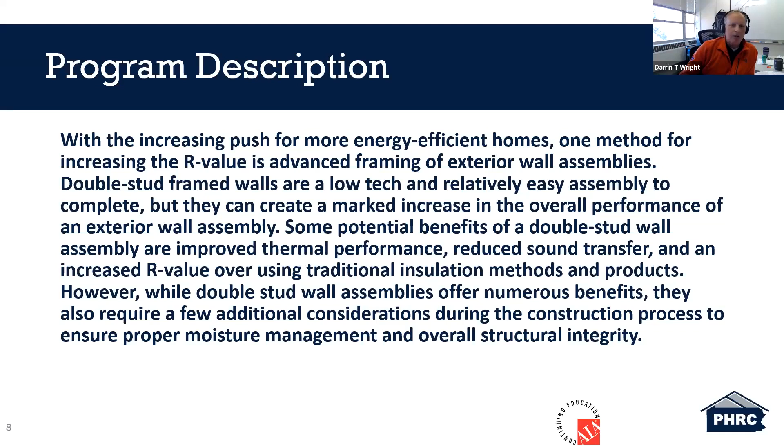So for me, I have a little bit of experience with double stud framing. I don't know, I've met some of you. Most of my construction experience really focuses in the southeast, in the Asheville, North Carolina region, and the coastal regions of South Carolina and the mountains of North Carolina. So down there, that zone, we weren't looking to push super insulation at that point anyway. I'm not sure exactly what they're doing in the mountains down there now, but back then I was always familiar with double stud framing. I was always intrigued by it. So that's one of the reasons why I picked this program and this topic.

So what I want to do today is give an understanding of the components of a double stud wall assembly, and show how a double stud framed wall can allow for increased R value, decreasing air permeability, and also lowering exterior noise pollution.

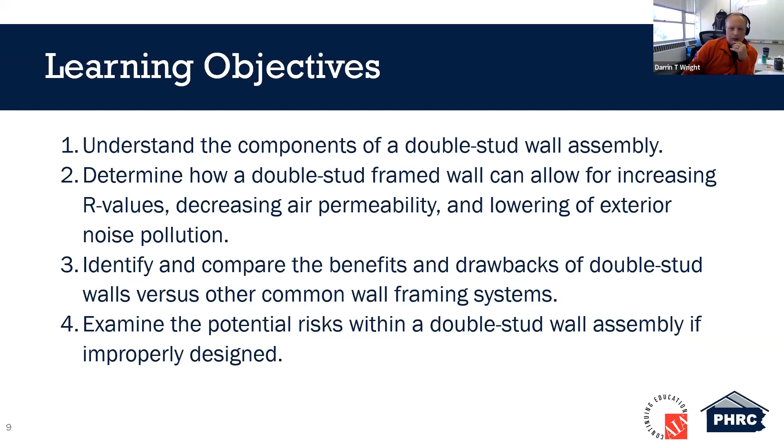Identify the benefits and the drawbacks. I know that some people feel there's a lot of drawbacks, and we'll try to get into that, not on a super deep level, but on a level I think we can all understand. And of course, examining the potential risks within the double wall assembly if improperly designed. I mean, that's something we can say about any wall assembly. If it's improperly designed, there's inherent risk.

And of course, as we say with all our webinars, this is where we're at right now in Pennsylvania. We're in the 2018 code book. So I know 2025, they're looking at revisiting that and exploring options moving forward after that year, and there's potential for change to what we're dealing with right now. But again, here we are, we're 4, 5, and 6 in Pennsylvania.

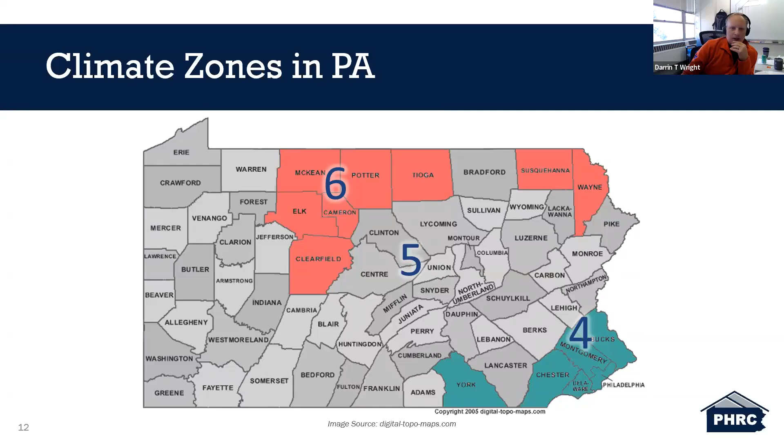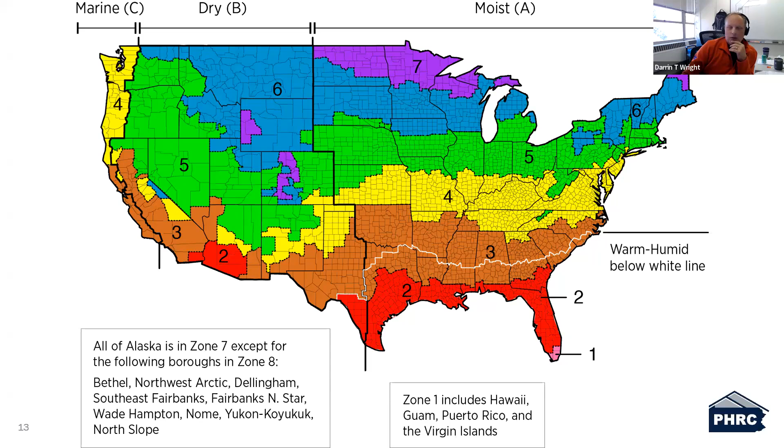And I kind of threw this one in here too, because I wanted to explain some of my references for builders, where they're doing most of this construction that I'm referencing, which is up in the Massachusetts, Connecticut, New England area. As you can see, especially Massachusetts, they're within our zone of construction. I know zone 5 in Virginia is different than zone 5 in New York, but our weather and climate zones are pretty similar, so they're using this type of framing more than we are down here.

And of course, the 2018 IRC table right here, I have highlighted what I'm going to be referencing and talking about, what we're currently following. We know we have R20 or R13 with 5, and then zone 4 is the same. In zone 6, we get a little bit more intense: we have R20 with 5, and R13 with 10.

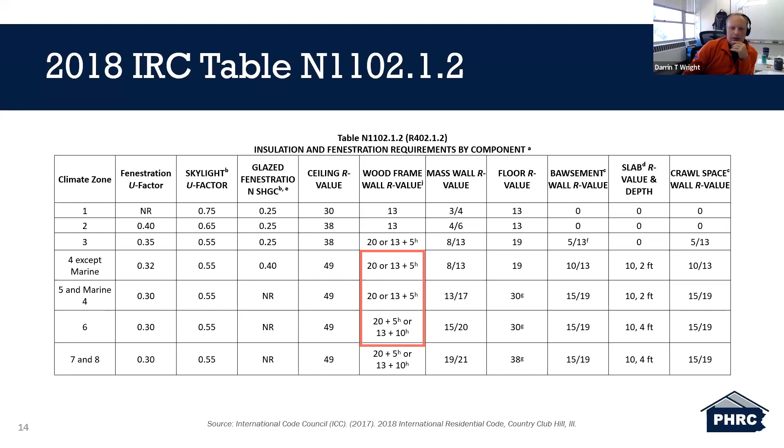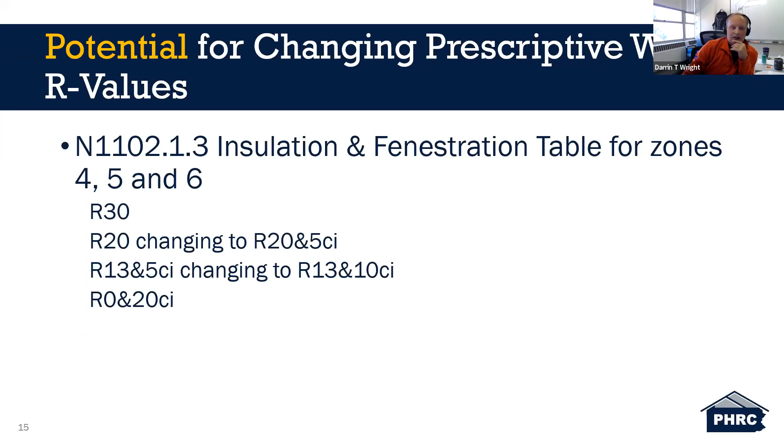The changes, the potential for change if we move to the 2021 code, are a little bit more intense. We're going to be requiring an R30. An R20 is still going to be there, but you're going to have an R5 of continuous insulation on the outside. If you're going to stick with an R13, you're going to have to bump that up to 10. And if you choose for some reason to have no insulation in your walls, you're going to have the option of an R20 of continuous insulation on the exterior of your building.

And this is what the table looks like in that code. The nice thing about this is they're all the same—there's not really a variation from 4 to 6.

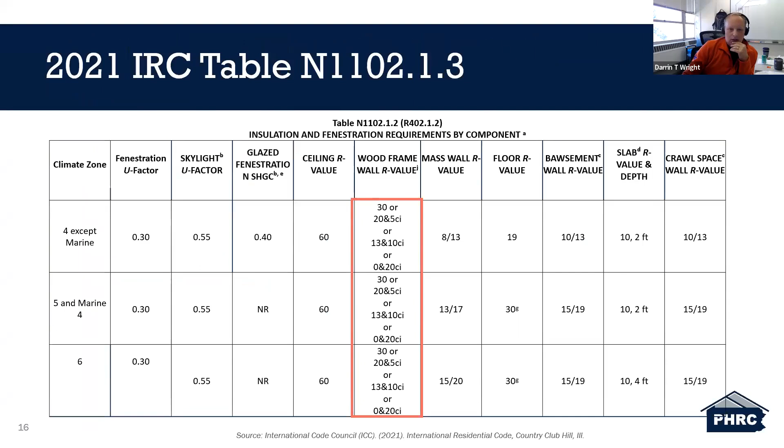Okay, what is the perfect wall assembly? Why am I asking this? Because I get questions quite a bit of somebody saying, just tell me what I need to build. What's the perfect wall that I can just build and be done with it? And as Joe Lstiburek said, the perfect wall is an environmental separator. It has to keep the outside out and the inside in, and it's as simple as that. But there is no real perfect wall assembly that you can just build and use it from location to location.

Obviously, walls we're designing with 4 control areas in mind. We want to control the rain, we want to control the air, we want to deal with the vapor situation, and thermally we want to be able to stop the movement of heat or cold within our assembly.

And I say the perfect wall assembly because what I really want to say is, even here in central Pennsylvania, in Centre County, if you were to build a house on top of a hill where it's sunny, you have no trees, and it's breezy up there, and then less than a mile away, you could be down in a deep valley surrounded by trees next to a stream, where you might get sun only 3 hours a day. You're both within zone 5, but you have 2 completely different construction environments there.

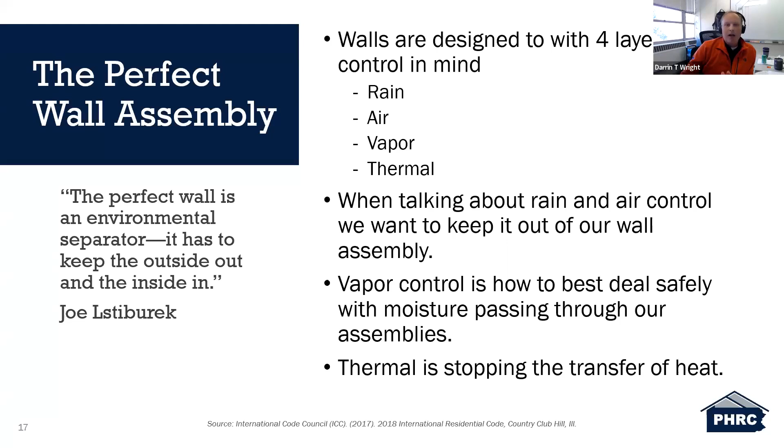So there is a perfect wall assembly, but there's just not one that you can use across the board and be really comfortable using it, in my opinion.

Double wall stud framing is maybe considered advanced framing. It's not really optimal value engineering framing. What this is here is just a more efficient way of framing a wall, so you're using less wood in that assembly and you can get more insulation in that assembly. That's really where this started: obviously you're going to save money by removing wood and streamlining your framing, but you're also going to increase the R value of your wall assemblies by framing this way.

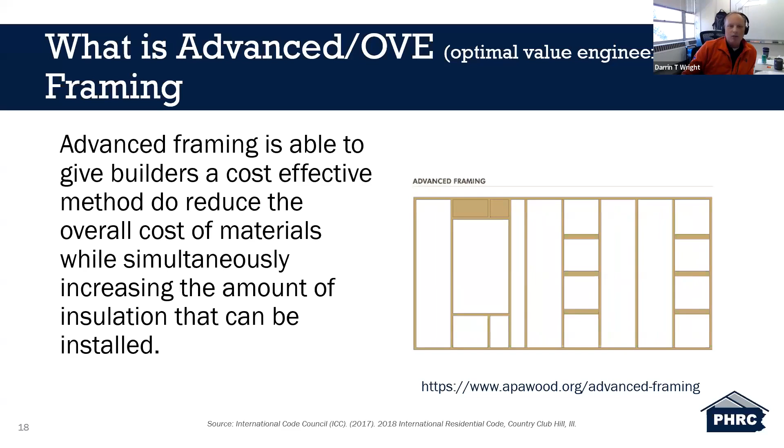Why double stud wall for me? In my opinion, it's a very 'uncomplicated' system of framing. Like with any other type of advanced framing assembly, you can make something more complicated if you want to, and there are reasons why you might have to make it a more complicated assembly. But on a really basic level, a double stud wall assembly is just basically 2x4 framing with another set of 2x4 framing in front of it. Anybody with basic carpentry skills and knowledge can frame a double stud wall.

It has the potential for extremely high R value. Obviously, as deep as you want to make this cavity, you can increase the R values, reaching R30, R40, even up to R50 if you want to. Another benefit of double stud framing is you virtually remove all thermal bridging. Obviously you're going to have a little on the bottom, where your sheathing transitions from the exterior to the interior, but if it's framed properly, it's an excellent way of removing most thermal bridging from your wall assembly.

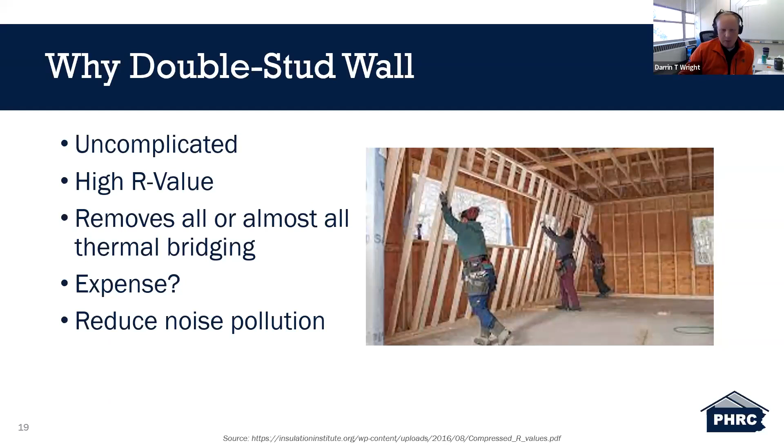And one benefit is it reduces noise pollution. So if you live in town or next to a busy road, this wall is much quieter than a traditionally framed wall. I think a lot of people might have seen some variation of this assembly, called an offset wall, that people use on the inside of houses, maybe to separate a bedroom from a living space to help reduce that noise pollution, that noise transfer.

The level of complexity, there are many different variations of a double stud wall. The most basic traditional sense, it's just a 2x4, 16 inches on center. And you can go up from there where you're doing different versions of this.

There's a version that uses a Larson truss that's actually hung on the exterior of a wall. So you'd basically shift your bearing wall from the exterior wall to the interior wall, but that exterior wall is also pushed to the outside and it's hung. We'll talk a little bit more about that later on.

In areas where it's heavier wind loads, you might still be required to do 2x6 framing, and you just might frame it on the exterior, not the interior. You just might feel as a builder, even if it's not required, that's something you want to continue to do.

And there are options. You can frame a 2x4 wall, 2x4 wall, 24 inches on center. It might be a good idea to get an engineer sign off on this, just to be sure. I'm talking about the exterior, not the interior version of this.

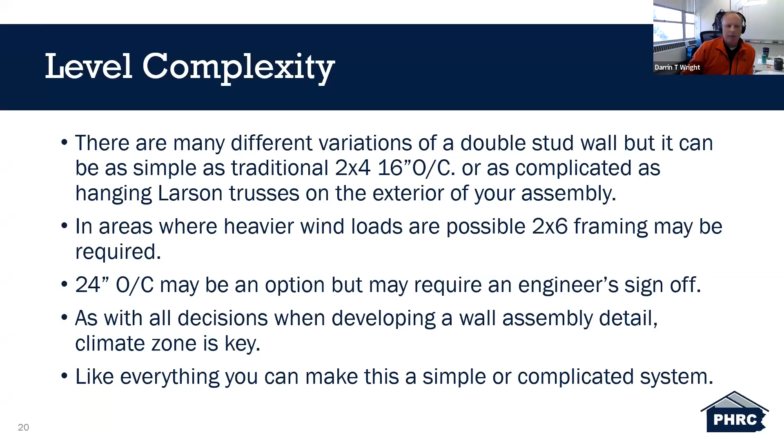Again, as with all decisions when developing a wall assembly detail, climate zone is key. Pay attention not only to climate zone, but also the location of where you're going to be building this assembly. And like everything, you can make this as simple or as complicated as you want.

And if you use 1/2-inch plywood on that, you want to take into account your rough openings and expand them the adequate amount to compensate for that plywood. The worst case scenario is if you didn't do that, and you already have your windows ordered - then you're in trouble, and it's a complicated mess to deal with.

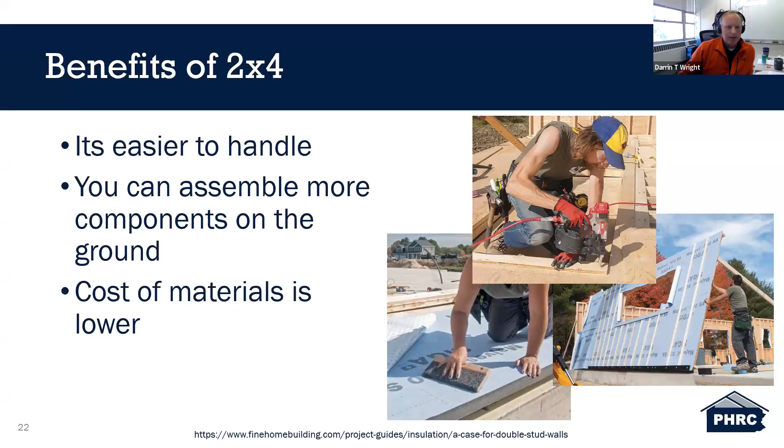Now, there are different variations of a double stud wall assembly. One that we've seen recently here in State College on a retrofit was they use a Larson truss on the exterior of the building. A Larson truss, if you're not familiar with it, is basically a site-built assembly that kind of resembles an I-joist, but it's technically not an I-joist. In this application, like the one in town here, they just removed all the exterior siding, anything right up to the wood sheathing, and hung their trusses on that. They built them in place, attaching the 2x material your engineer has spec'd, applying plywood gussets, and going on from there.

It's a more complicated way of building, obviously, but in situations where you don't want to lose floor space and want to keep your interior as open as possible, especially if you're retrofitting an older house which already has a small footprint, this is a really good option. But this is going to take some more exploring. If this is the option you want to explore, it's going to take a little bit of work on your part to really understand how to do this best.

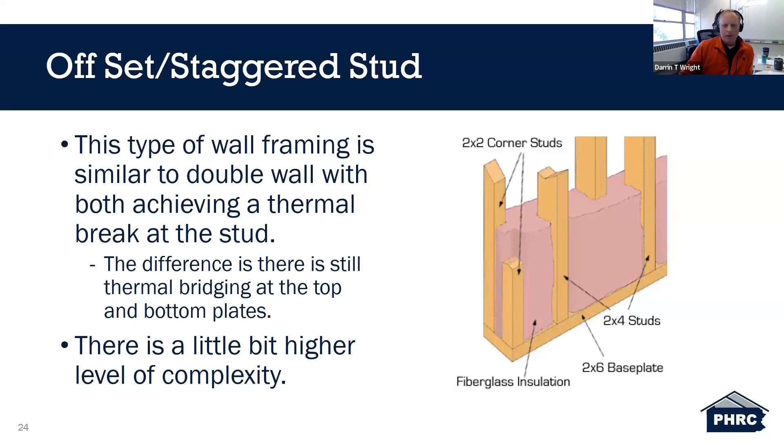I can imagine myself framing this wall. It would be more difficult to frame laying down than just a standard 2x4 wall framed on the ground. There was a comment in the chat pod about an instance where they did the 2x4 staggered stud, and based on that comment, it looks like it doesn't always come in with the best rigidity. So they used an LVL for the single top plate, and a standard 2x8 for the bottom. Thanks, Brian, for that.

That makes great sense. I think what Brian was saying, if people haven't had the chance to read his comment, is that he does an offset but uses an LVL single top plate and a 2x8 bottom plate. To reach the goal you want to reach, there are lots of ways to do this. If this is your place of comfort, and I appreciate him sharing that with me, that's a great idea. Go with what you feel comfortable with.

As I get older, framing to me is something I enjoy doing. But for me, I sort of am leaning towards this double stud assembly for the reason of ease, simplicity, and material choice. You can get a 2x4 almost anywhere in decent shape. The bigger you go with lumber, the longer lengths you get, and we all buy lumber from different places, and it sometimes can get not so clean. So again, do what makes you feel comfortable.

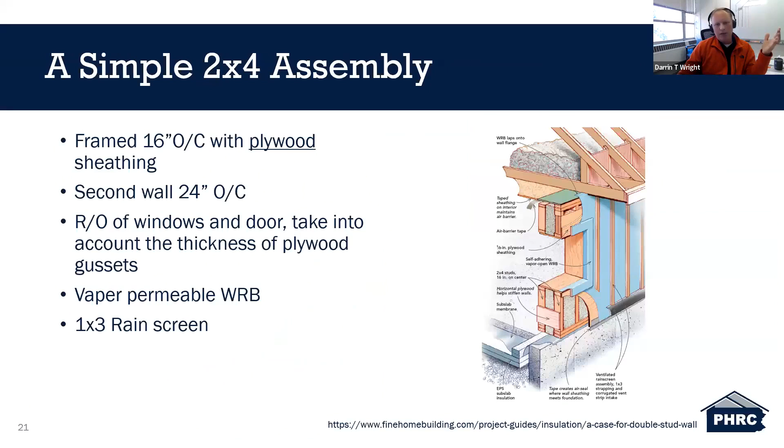Moving on a bit, with a double stud assembly, the one I'm talking about and the one I showed you earlier, they're using plywood sheathing rather than OSB. One reason they use plywood over OSB is that it's more permeable.

If you have a thick wall assembly like a double stud assembly, and you're drying in both directions, which is ideally what you want, using plywood over OSB gives you a bit more of a vapor-open avenue of escape for that moisture.

Obviously there are drawbacks to both, and plywood and OSB don't cost the same. Plywood is more expensive than OSB, obviously, but that's a trade-off. OSB is permeable, and don't quote me exactly, but I think it can get up to about 10 to 12 perms. So it's semi-permeable, I guess is what I want to say.

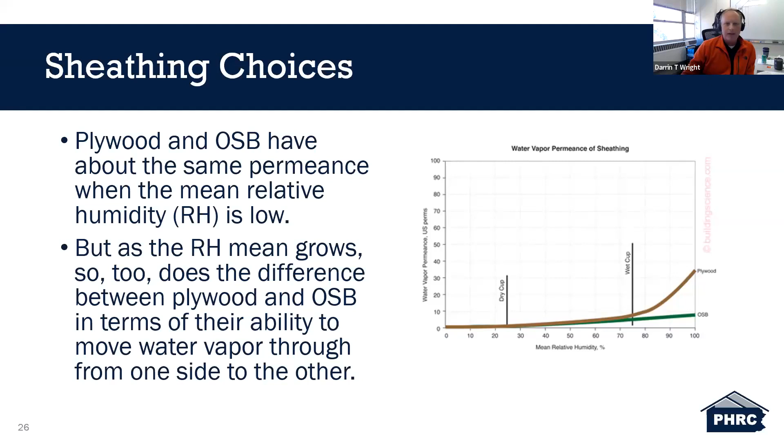I laid out a bit of the pluses and minuses of both. Plywood is very permeable and dries extremely quickly -- quotes, it's not going to dry as fast as the cellulose insulation inside, but it has the ability to dry relatively quickly compared to other options. It can be used as an air barrier, though you'll need to treat the joints, like with zip systems, taping the joints as well. So there's that added expense, and you will need a WRB with this.

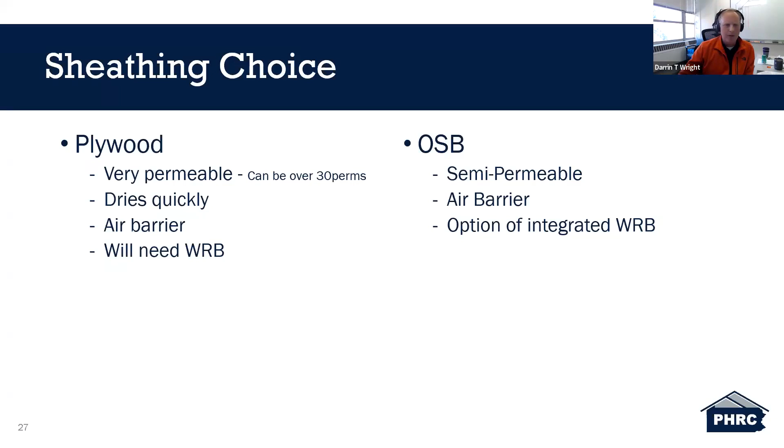OSB is semi-permeable, so it can dry. There are people using OSB in this type of assembly up in zone 6, in the north, with success. It's obviously an air barrier, and you have the option of an integrated WRB as well -- there are a few different companies that offer that, which you're all familiar with by now.

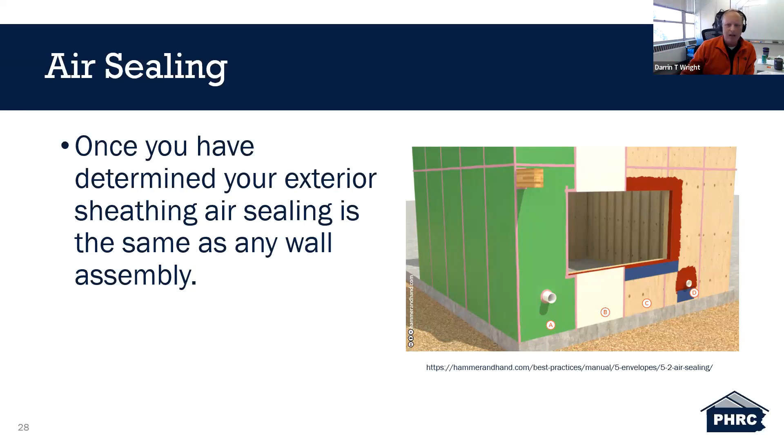Once you determine your exterior sheathing, air sealing works just the same way as any other assembly. Again, the simplicity of this -- you're not learning something new to use a double stud wall assembly. If you're going for passive house and want to build an R40 wall assembly, it's the same steps, same materials, a little more thought, but the complication factor is the same.

Here's just a few different ways of doing that. I included some pictures -- Tyvek is a WRB, and Tyvek can be used as an air barrier as well.

In the assembly here in the middle, they're using OSB as an air barrier in the ceiling. The company I referenced earlier that uses plywood as their exterior sheathing actually uses OSB in the ceiling of their first or second story, whichever is their air barrier, and then tapes the seams within that. Again, there are multiple ways of creating an air barrier -- it's the same air barrier you're using now, whether it's drywall, a fabric air barrier, or OSB in your ceiling, that is the same.

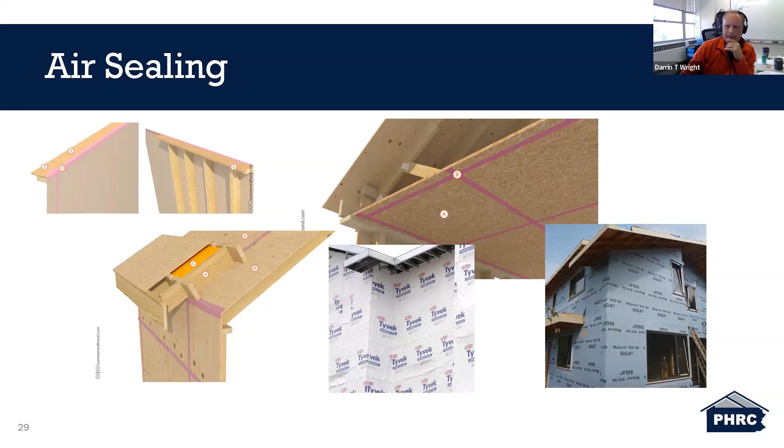Even that doesn't change just because you're using a double stud assembly. If you're not using OSB integrated with a WRB, you'll need to plan just like any other wall assembly. And depending on the type of siding, a rain screen is often recommended to help keep the wall assembly dry.

This is just a good idea as much as possible -- the bigger gap you can get in there, the better drying you're going to get. Obviously using vinyl siding does a pretty good job of keeping air flowing, but if you're using something like a Hardie board or another type of siding, that gap is essential to helping get the moisture out from inside your wall.

Like I said, if you're using plywood, that plywood gets damp. The more air you have coming across that surface, the faster that air pulls moisture away from your building, and the faster your interior assemblies dry. It doesn't only help with water striking your building -- it actually benefits drying the interior portion of your wall as well.

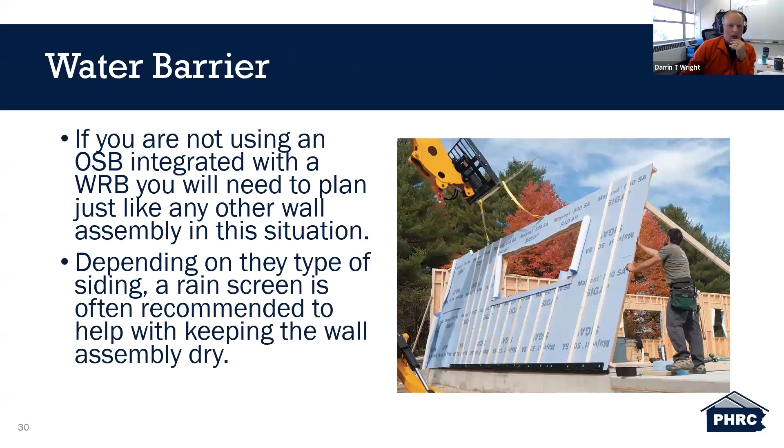That's, in my opinion, a rain screen is vitally important on both those factors. Insulation.

The right insulation does matter on any wall assembly. With a double wall assembly, we have cellulose options. You have fiberglass batt insulation, spray foam insulation. The two most common insulations you're going to find in this type of wall assembly, this thicker wall assembly, is cellulose and spray foam.

Just because of the thermal bridging factor, you're trying to fill in spots and locations within this assembly that if you use batt insulation, it'd be really difficult to tuck it into these corners and put it between the top plates and the bottom plates. So spray foam and cellulose are the two most common options you're going to see generally with this type of assembly.

You want to know the guy or the girl, or whoever's installing this insulation for you, is doing it the correct way. They understand how to get the right pack. They understand how to make sure it gets everywhere it needs to get.

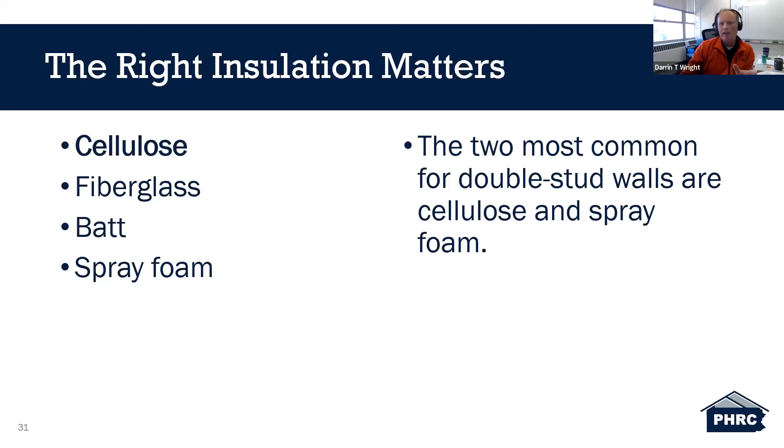And that's where the quality of the installer comes into play here. Don't go with the cheapest option, go with the best option. And if you've never used cellulose, talk to other builders, talk to, if you belong to your local builders association, reach out to those guys who are using this, ask them who they are using, and get those recommendations, because it makes a huge difference. If you've seen poorly installed batt insulation, the installation of the insulation is critical to getting a true R value.

It doesn't stop air infiltration, but it does a good job of sort of helping to eliminate that convection effect within a wall cavity. It's going to slow the air down. It's going to help you in that aspect of your assembly. And cellulose is hygroscopic, which means if it does get damp, if it does get moisture within the assembly, it's going to move that moisture relatively quickly, and it's going to even it out over a larger area. So you're not going to have a wet ball of insulation, and the moisture shouldn't hang out in that area. It should begin to move it rather quickly out and away, which allows for the drying effect to happen.

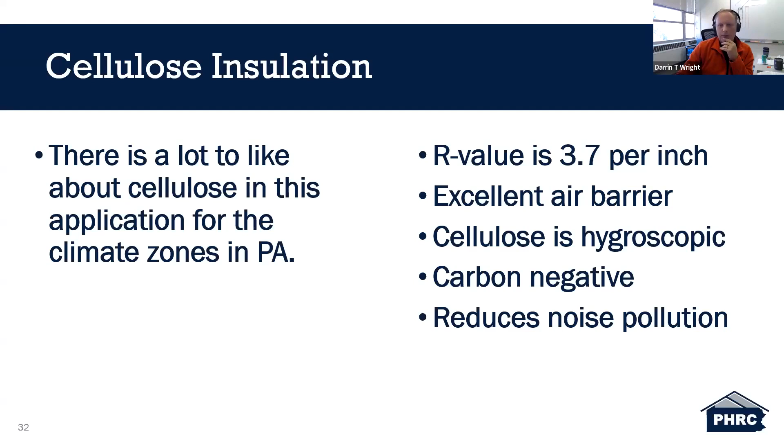And of course, it helps reduce noise pollution. It's good at dampening the noise coming from the inside to the outside.

And there's less energy use or demand needed to create the cellulose insulation and blow in the insulation than there is for other types of insulation as well.

Mark asks in the chat, is a rain screen effective in low humidity environments out west? I think a rain screen is effective everywhere. I'm assuming that's the question.

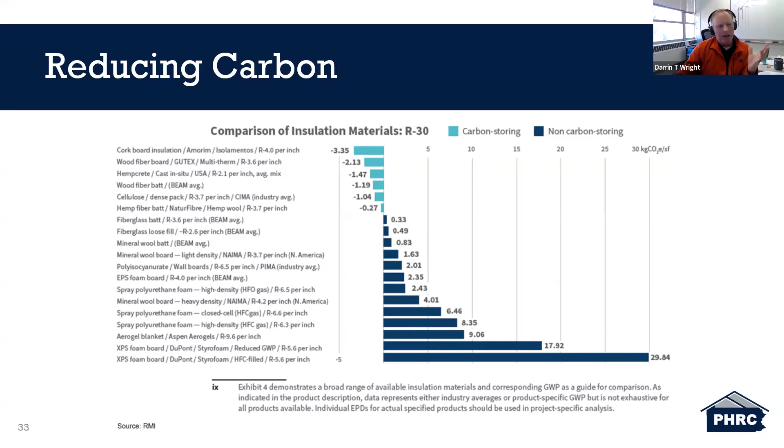A rain screen, in my opinion, is a good thing to do, a good option for everything, no matter where you're building. Again, the reason I mentioned the rain screen was just for drying and durability factors.

Spray foam is an excellent insulator. Obviously, if you're using a dense one, closed cell, it's up to R7 per inch. Again, this is one of those areas where you got to be extremely careful on where you're using spray foam. Fifteen, twenty years ago, it was just used - spray foam is going to fix everything, it's going to be a super insulator, it's going to seal all the air gaps. And it is an excellent insulator, and it does a good job of helping control air.

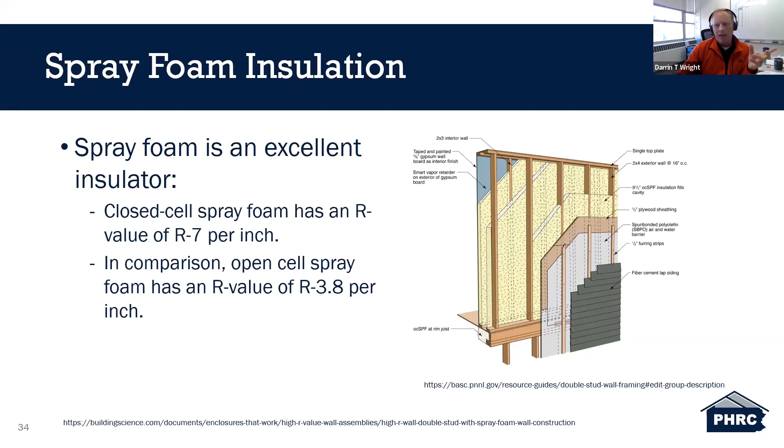But you can have issues there as well, especially when it comes to moisture. You want to make sure that if you are using it, you're using it in the right location, within the right materials. It's just a little bit more unforgiving, in my opinion, than you're going to have with cellulose.

A little bit of thought here - some modeling. When I first started really reading hard, a decade or 15 years ago, about double wall assemblies, they were talking about modeling, and some modeling was showing 12 inches of walls insulated on the interior side of the sheathing will have elevated moisture levels well above 20% for prolonged periods of time.

And that makes sense if you just quickly think about it. If you're going to have a 12-inch wall with lots of insulation, the exterior sheathing is going to get cold in the winter. It seems like that moisture is going to travel through, get trapped there, and soak my sheathing, and I'm going to run into some major problems. Obviously, that's a possibility. You never want high levels of moisture against an exterior sheath wall, especially if it's an OSB wall, for extended periods of time.

A little bit of moisture is fine. The key is how fast that moisture leaves. As fast as it gets attached to that wall or into that wall, you want it to be able to leave that assembly, that sheathing, just as fast, if not faster.

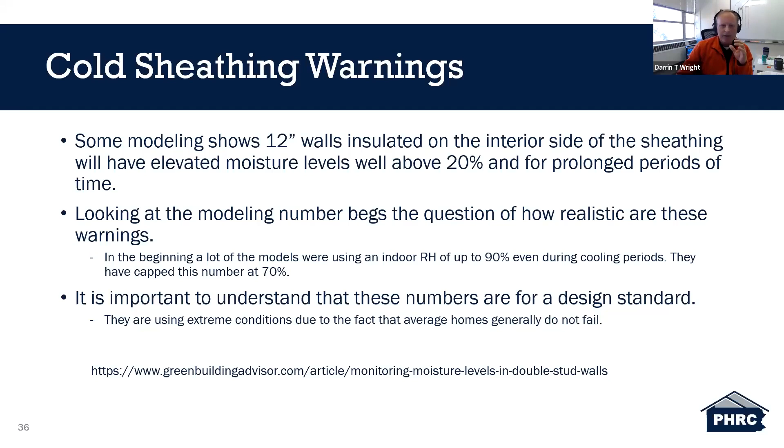One of the studies I read about, with the double stud wall up north, they were having issues with numbers on the interior of the wall assembly in the wintertime spiking up to 40%. They couldn't figure out what was going on until they talked to the homeowners, and apparently there was a failure—something had broken within their ERV, so they weren't exhausting the bathrooms like they should be. They fixed that issue, but for some reason the clients never told the builder or the people running the study. Two weeks later, the numbers were back down to manageable and appropriate numbers.

So yeah, you can have failures within any assembly. It could be a building failure, or it could also be an operational error, where it's just not being used—the house isn't being used like it technically should be.

Because mold is something we want to be conscious of. Mold and fungi need at least 20% moisture to grow. Below there, you're pretty safe. Obviously in the dead of winter this is not going to be as big a concern as in the summertime—mold's not going to grow in a frozen or really cold environment. It will grow, and in this case what they're saying is above 28 degrees, though I'd guess it's extremely slow and difficult growth at that temperature. What I understand is below 50 degrees you really begin to retard the growth of these things as well. But that magic number most people are aware of is that 20%.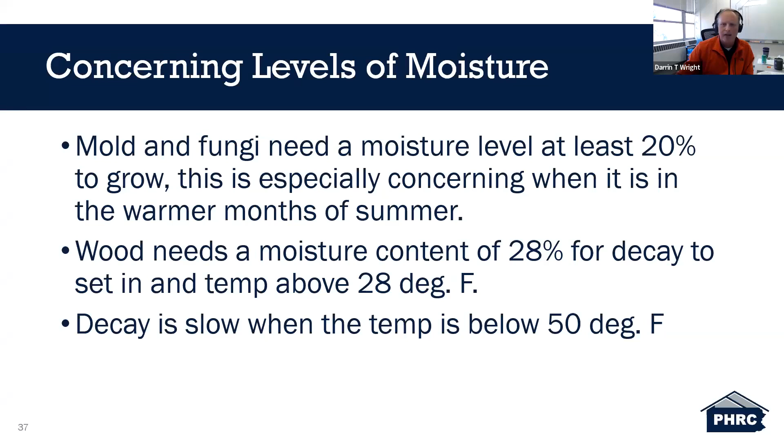There's one of the studies I was reading about—a monitored field study that took place in Massachusetts, zone 5. The house was built with R40 insulation, a double studded wall with cellulose insulation and OSB sheathing. They used a gypsum wallboard primed with a 0.5 perm vapor retarder, which I think is an excellent idea, because you need that vapor inhibitor on the inside. It's always a great idea to have that vapor inhibitor on the interior of your structure. You can use a primer, or one of these smart membranes they have now—they're kind of expensive but they work fantastic. I don't know the chemistry or mechanics of those things, I'm assuming they just work. But anyway, in this system the cladding was vinyl siding, which is a well-ventilated siding.

They monitored this house on the north and south sides and just let the people live in it. Most of the year they were getting a reading on that exterior sheathing of around 10%, with slight variations up and down, but the worst reading was in February, right at 20%. By the time April rolled around, those readings were back down to 10%. So it's telling them that yes, they are getting higher than desirable numbers, but it's drying in an efficient way, such that 20% should not be a factor contributing to problems within that assembly.

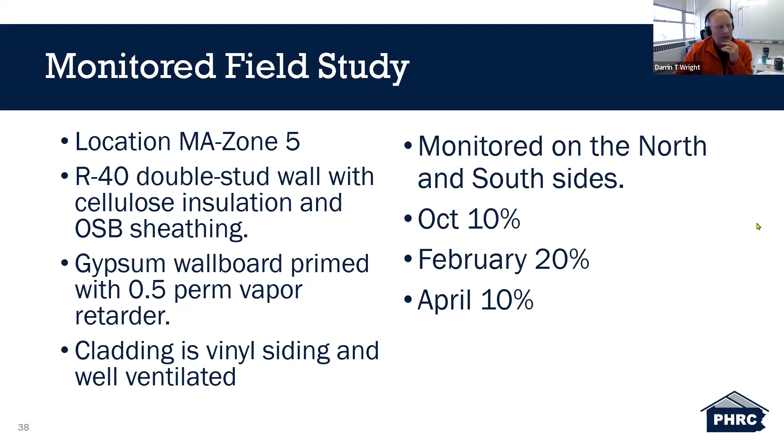I wish I had more. This is Thomas. If somebody else can talk to this, I have a commercial project with 12 inches of TJI filled with dense pack still standing. My commercial experience, I've got to say, Thomas, is pretty limited, mostly with light commercial, single story structures, things like that. And where I was doing that work was mostly down south. So if somebody else can comment on that, that would be fantastic. I'm going to move on here a little bit.

Summary: double stud wall assemblies are an attractive option for higher R-value wall assemblies. They are relatively simple to implement. The caution is that this type of wall assembly has potential for being on the edge between risky and safe. So it is important to choose the right materials with a high permeability rating, such as plywood over OSB.

Again, we are moving into a type of building now where building science is becoming more and more important. We all understand the importance of paying attention to assemblies and how we put things together, how we merge materials with materials. Some work better than others. All wall assemblies are becoming riskier. It's how we mitigate those risks and how we think about our assemblies before we move on. Once we have that knowledge and the ability to understand how to best build a safe wall, we can expand on that.

With a double wall assembly, if you're going to do an R30 and a client says I want R40, and you have the system worked out, you're just going to scoot your interior wall in a little bit. Yeah, it's going to be a little less floor space, and if they're okay with that, that's what it's going to be. But it's an easy assembly to put together.

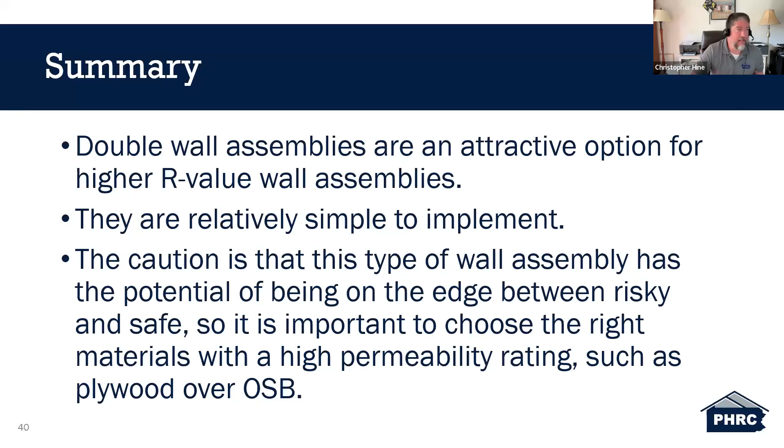Again, I just want to say thanks for tuning in. This is one of those topics that has got a lot of history and controversy about it, but I think it's one worth exploring. We don't know what's coming up in the future as far as code. I'm not saying it's going to change, but 2025 is around the corner, and they're going to be looking at things they want to possibly move to, and we might be moving to a more intense requirement. So keep your options open, start thinking about the future.